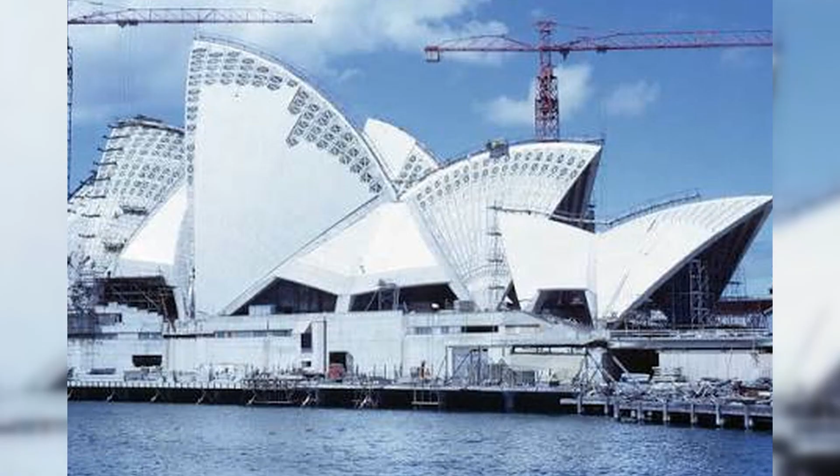In February of 1966, Jørn Utzon walked out of the most important project of his life. The concrete sails of the Sydney Opera House were rising above the harbor, but the interiors were still unresolved, the cost was climbing, and the building was years from completion. Utzon left Australia soon afterward and never returned. Yet the structure he abandoned would become one of the most recognizable buildings on Earth.

Stick around, because the story of the Sydney Opera House is not simply about an architect with a beautiful idea. It is about a design that could not initially be built, an engineering team that had to invent new methods to make it possible, and a political conflict that separated a masterpiece from the man who created it.

The building stands on Bennelong Point, a narrow promontory between Sydney Cove and Farm Cove. Long before the modern city existed, the land was a gathering place for the Gadigal people of the Eora Nation. Its English name recalls Woollaraware Bennelong, an Aboriginal man who became an intermediary between the local population and the first British colonists. A small house built for him once stood near the point. It was later replaced by Fort Macquarie, and then by a tram depot whose long sheds occupied one of the finest positions in Sydney Harbour.

By the late 1940s, that location had attracted the attention of Eugene Goossens, the conductor of the Sydney Symphony Orchestra and director of the New South Wales State Conservatorium of Music. Sydney had grown into Australia's leading city, but its orchestra still performed in the town hall, a venue never designed to serve as a modern home for symphonic music, opera, ballet, and theatre. Goossens argued that a city with global ambitions needed a cultural institution worthy of its harbour. He also insisted that it should stand on Bennelong Point, where architecture, water, and skyline could become part of the same experience.

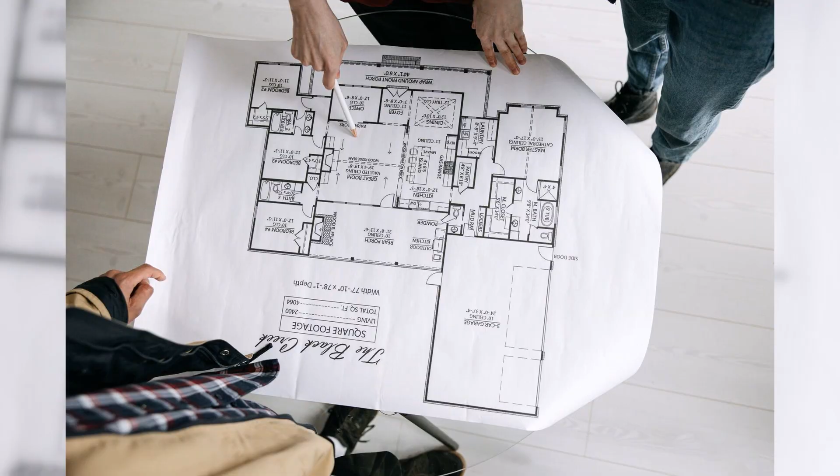The idea gained its decisive political supporter in Joseph Cahill, the Premier of New South Wales. Cahill saw the proposed opera house as more than a venue for wealthy audiences. He believed it could demonstrate that Australia was becoming a confident, modern nation with cultural ambitions equal to its economic growth. Bennelong Point was selected as the site in 1955, and on February 15, 1956, Cahill officially announced an international competition. The brief called for two main halls, one for concerts and large productions, and another for drama and smaller performances. The prize attracted more than 230 submissions from 32 countries.

The winning submission came from a Danish architect who was still little known outside Scandinavia. Jørn Utzon's drawings were remarkably simple. They showed two groups of pale, curved roofs rising from a monumental platform and facing the harbour. The forms appeared to float between architecture and nature. People would later compare them to sails, shells, bird wings, or waves, although Utzon drew inspiration from many natural shapes and never reduced the idea to a single image.

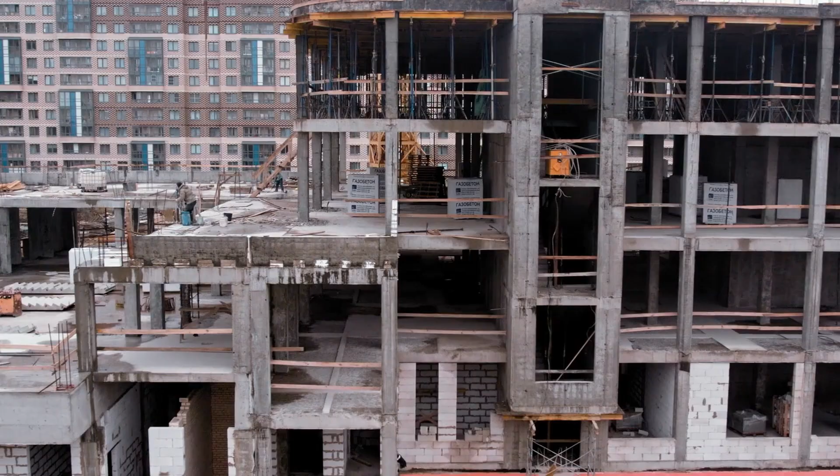What made the proposal unforgettable also made it dangerously incomplete. The competition drawings communicated a vision, not a finished construction system. The roof forms had no clearly defined geometry, and no one yet knew how to calculate, manufacture, or support them. The jury nevertheless recognized their potential. The Finnish-American architect Eero Saarinen strongly supported Utzon's entry, and in January of 1957 it was declared the winner. Australia had selected an image capable of transforming Sydney. It had not yet selected a building that engineers knew how to erect.

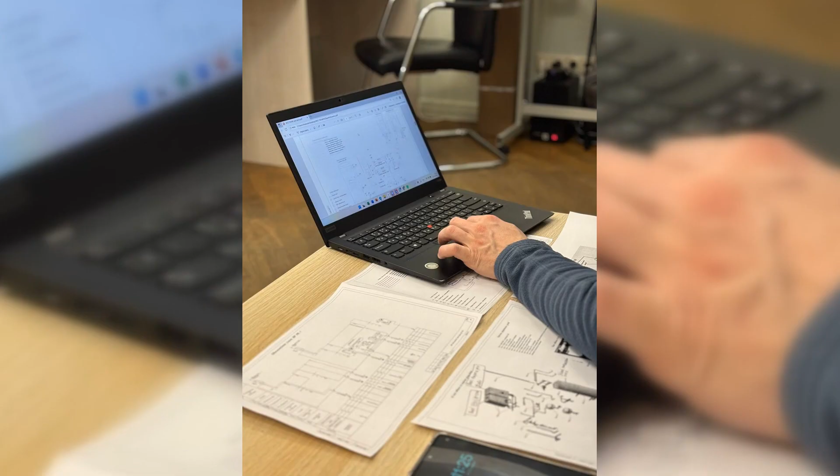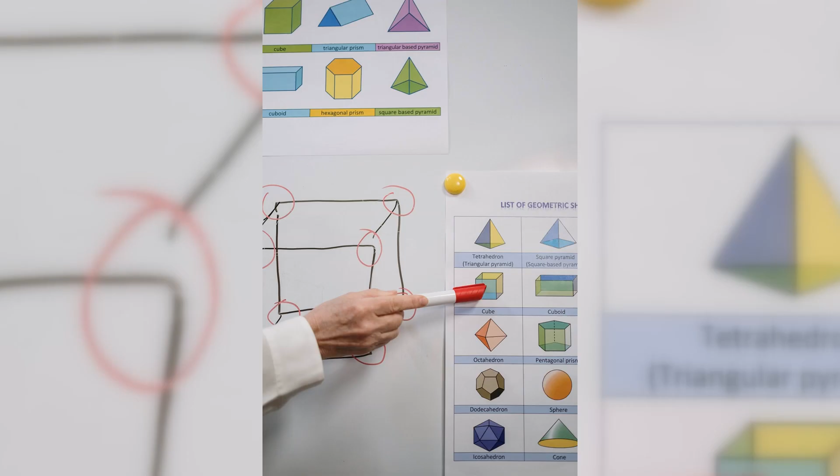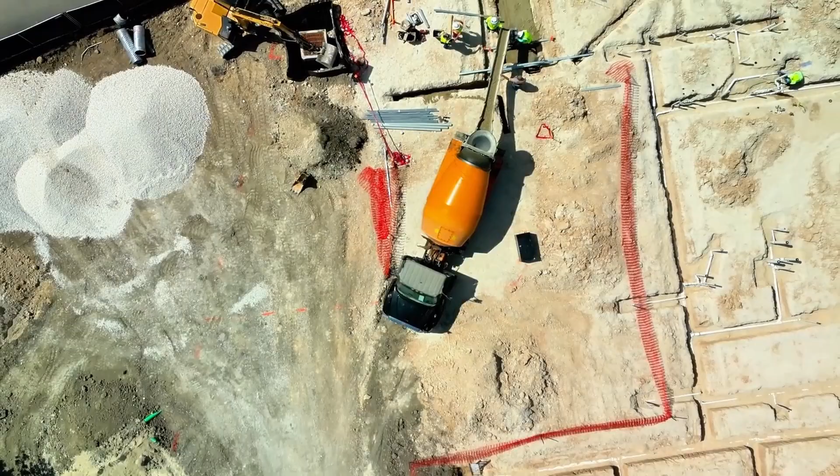Utzon turned to Ove Arup, one of the most innovative structural engineers of the period. Arup had built his reputation by combining engineering discipline with unusual architectural ideas, but even his team found the opera house roof extraordinarily difficult. The designers explored parabolic forms, ellipsoids, and other geometries. Every option created a similar problem. Each roof would require different formwork, different calculations, and large numbers of unique concrete pieces. A shape that looked effortless on paper threatened to become impossibly expensive in reality.

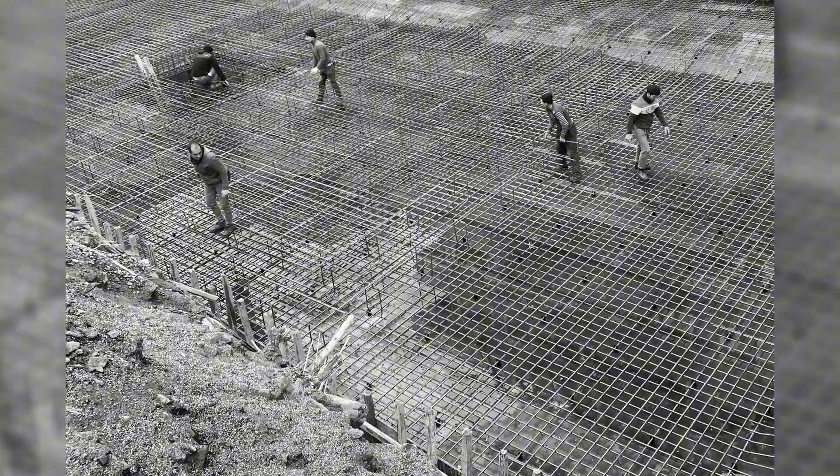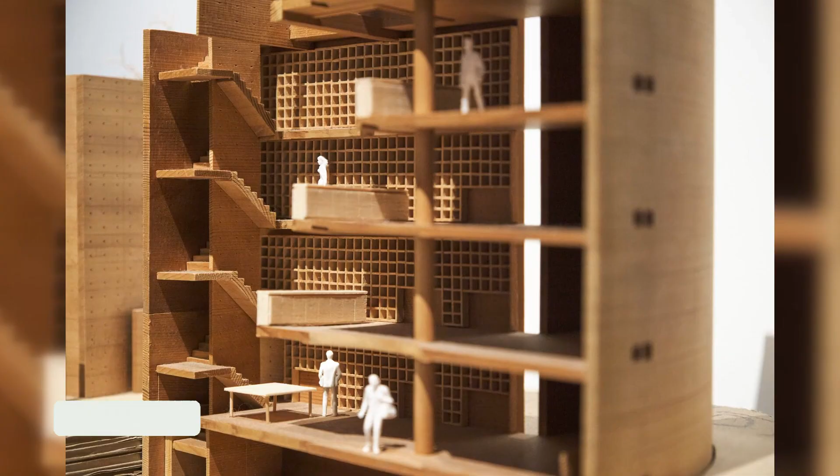Before that problem had been solved, the government ordered construction to begin. Political leaders feared that delay might weaken public support or threaten the financing of the project. The tram depot was demolished, and work started in March of 1959. Civil and Civic began building the Great Podium, while Utzon and Arup were still redesigning the roof above it. The opening was planned for Australia Day in 1963, and the original estimate was roughly 7 million Australian dollars. Starting early created the appearance of progress, but it transferred unresolved design questions directly onto the building site.

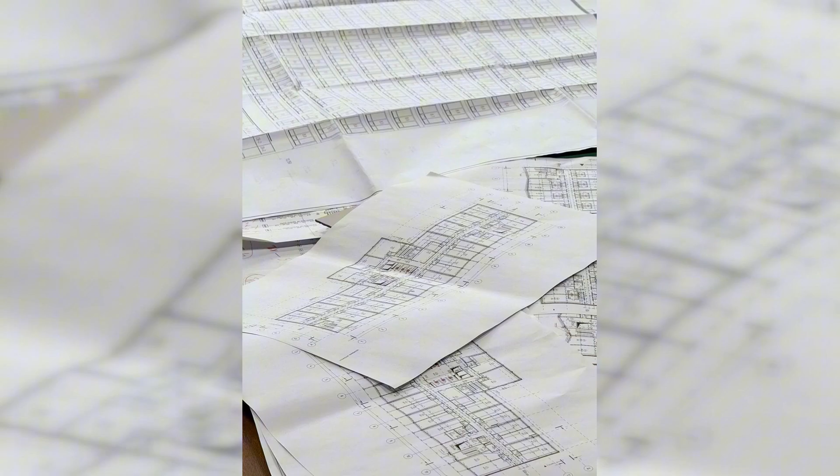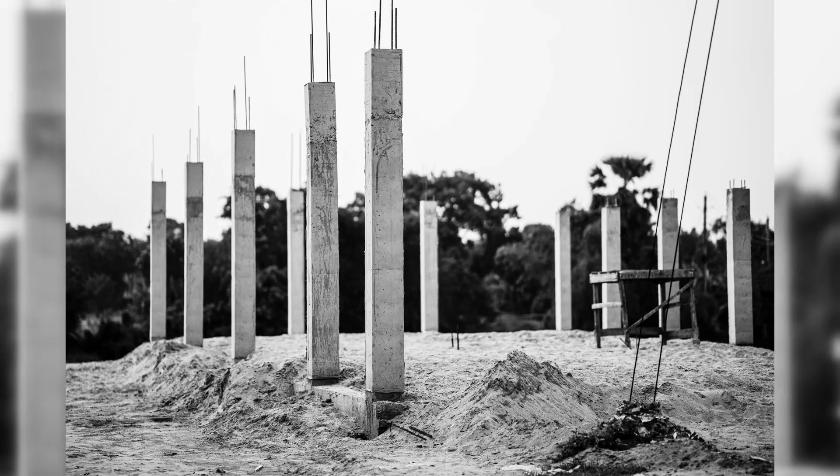Bad weather, drainage problems, changing documents, and incomplete drawings pushed the podium almost a year behind schedule. More seriously, some of its columns had been designed before the final roof loads were understood. They proved inadequate and had to be reconstructed. Sydney was already pouring concrete beneath a roof whose geometry did not yet exist. For several years, Utzon, Arup, Ronald Jenkins and their teams moved through one roof system after another. They needed a form that preserved the drama of the original sketches while allowing repeated components to be manufactured economically.

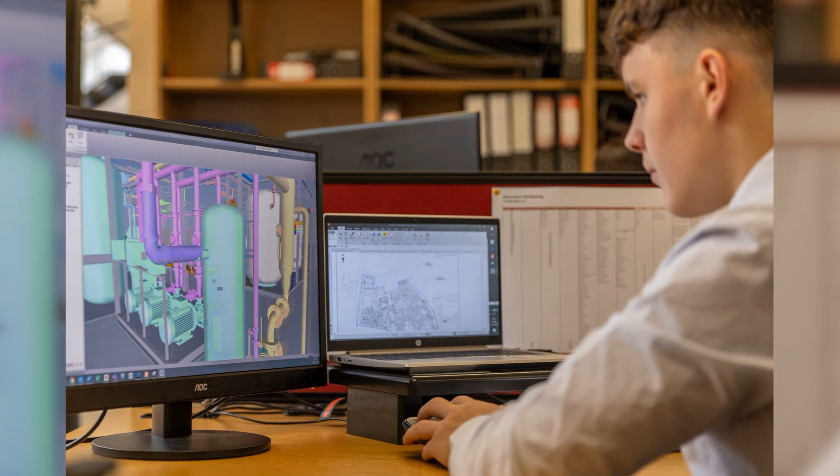The breakthrough finally came from Utzon. Derive every shell from the surface of a single sphere. The idea grew from years of collaboration with Arup's engineers, but it was Utzon's solution that unified the entire roof.

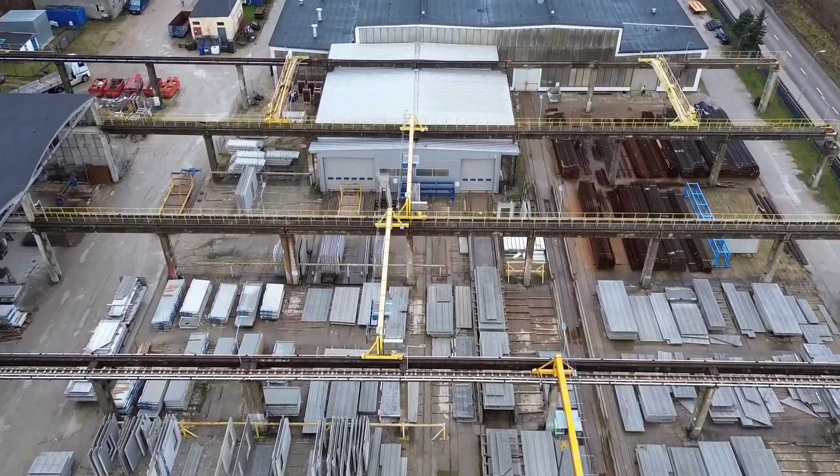Imagine slicing differently sized pieces from the surface of the same orange. Every piece may have a different outline, but all share the same curvature. That common curvature changed everything. Instead of producing unique molds for every part of every roof, the builders could cast families of standardized concrete segments. Ribs of different lengths could be assembled from related pieces and arranged into the fan-like forms visible today.

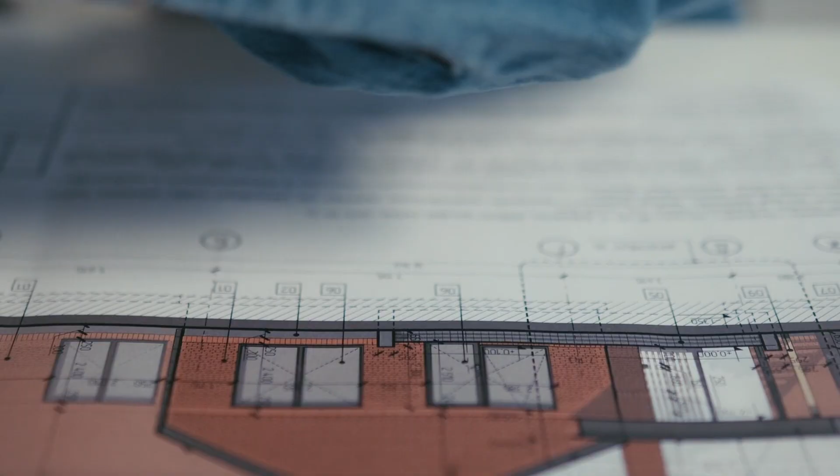The solution did not simplify the appearance of the building. It simplified the hidden logic behind it, turning an expressive drawing into a system that a factory could reproduce. Even with the spherical solution, the forces inside the roofs were too complex for conventional hand calculations alone. The Opera House became one of the earliest major buildings to use digital computers extensively in structural analysis.

These machines were primitive by modern standards, but they allowed engineers to test loads, stresses, and geometric relationships across thousands of calculations. Physical models were also tested in wind tunnels to understand how severe winds would press and pull against the unusual surfaces.

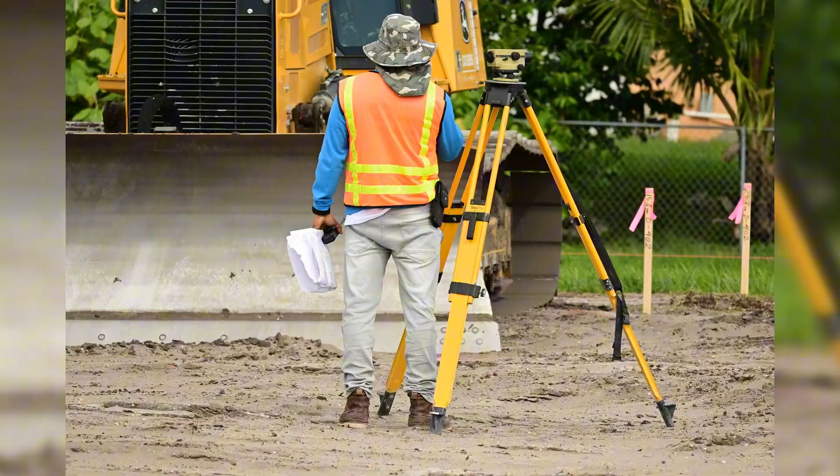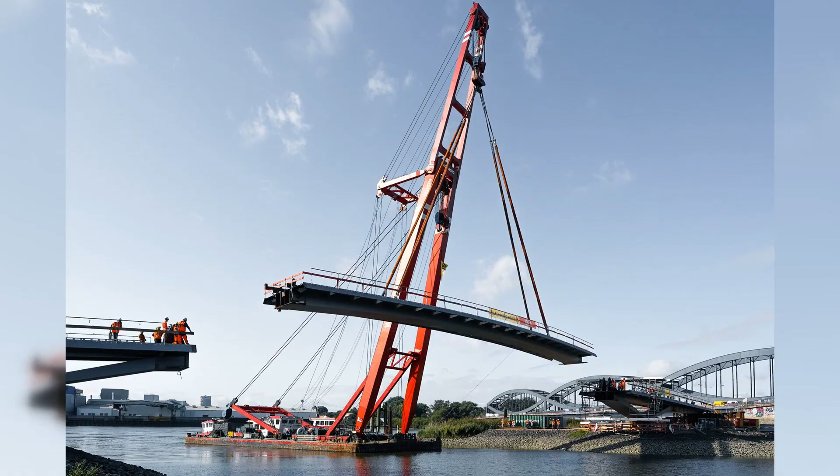Computers returned during construction. As each rib segment was positioned, surveyors measured its exact location. The figures could then be processed so that the team knew whether the structure was drifting away from the intended geometry. Small corrections were made before the next pieces were installed. At a time when most buildings were still designed and checked almost entirely by hand, the Opera House created a daily loop between the construction site, precise surveying, and digital calculation.

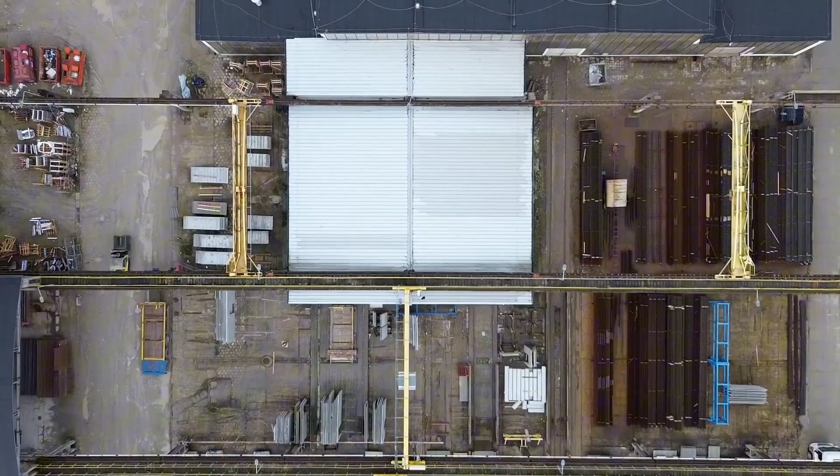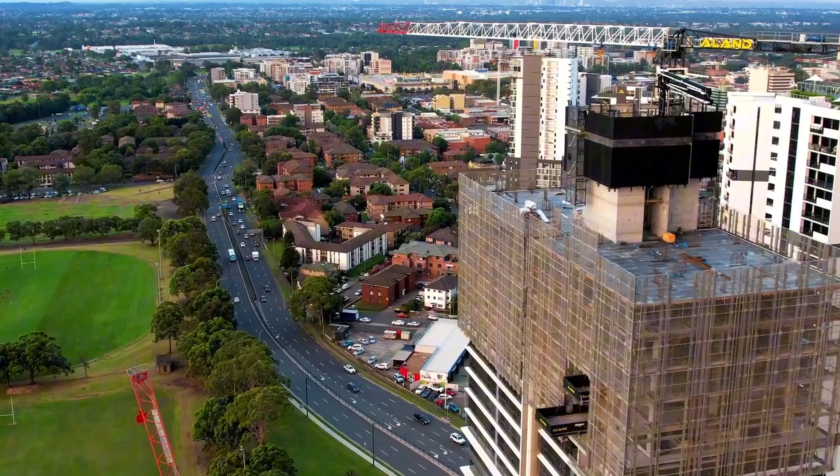The Australian contractor M.R. Hornibrook turned the site into something resembling a manufacturing plant. Thousands of concrete components were cast nearby instead of being formed individually high above the podium. An adjustable steel erection arch temporarily supported the ribs while they were assembled. This system, developed under Hornibrook engineer Joe Bertoni, could be altered for roofs of different sizes and then moved to the next position. Long before prefabrication and integrated digital construction became common industry language, Sydney was using both to build shapes that traditional methods could barely handle.

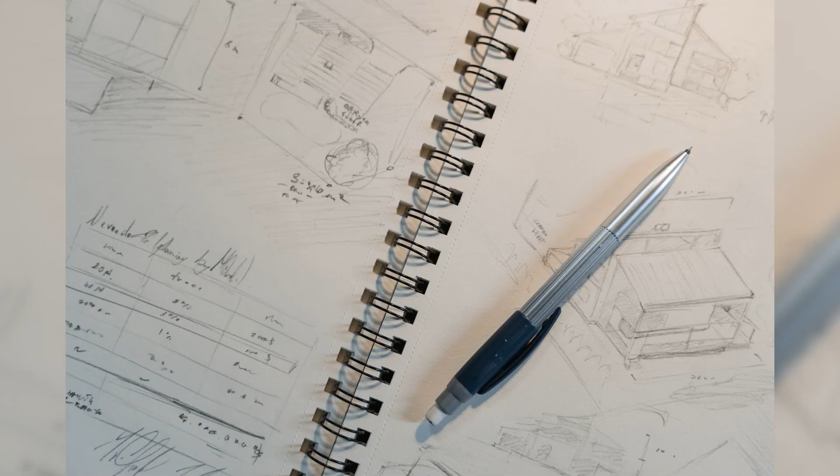The roof surface demanded another specially developed product. Utzon wanted it to appear brilliant in direct sunlight without becoming a flat, glaring white mass. The Swedish company Höganäs spent years developing what became known as the Sydney tile. More than 1 million small tiles combining glossy white with matte cream were arranged in a subtle chevron pattern. From across the harbor, the roofs seem uniformly pale. Up close, the changing finishes break the light and give the surfaces their texture.

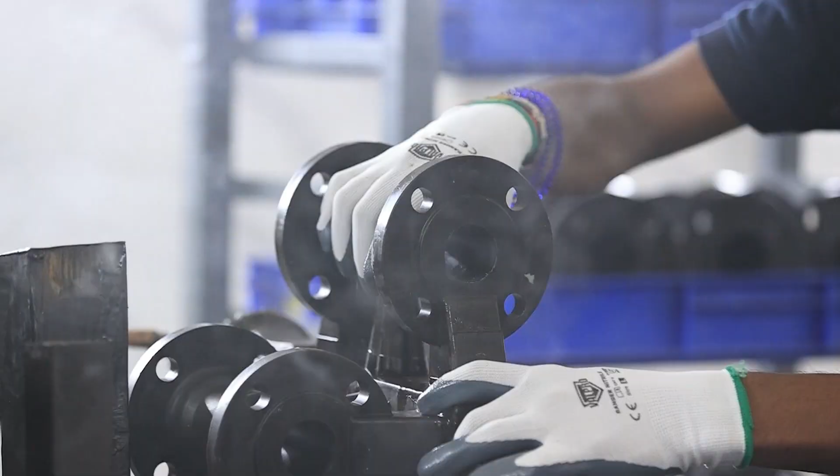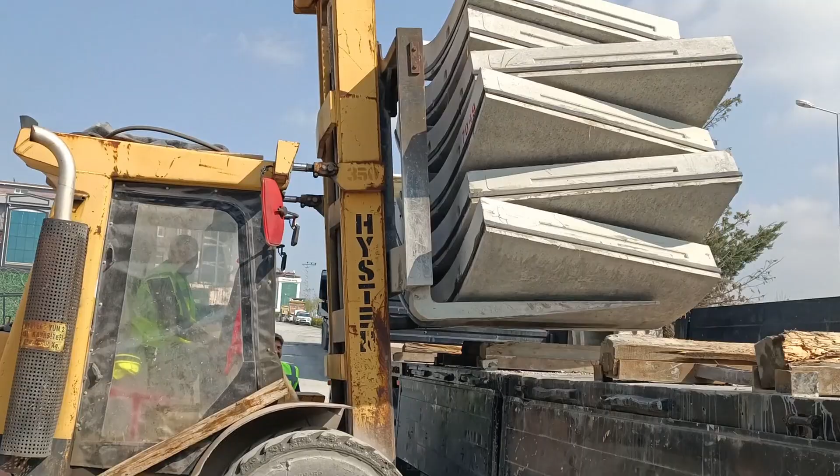Innovation extended beyond the shells. The great end walls required large areas of laminated safety glass, used at a scale that was highly unusual for architecture at the time. Epoxy resin helped connect precast components. The mechanical system used harbor water as part of its cooling process. Architects, engineers, manufacturers, and contractors had to work together from an early stage because no profession could solve the project independently. That collaboration anticipated the integrated design methods now used on many complex buildings.

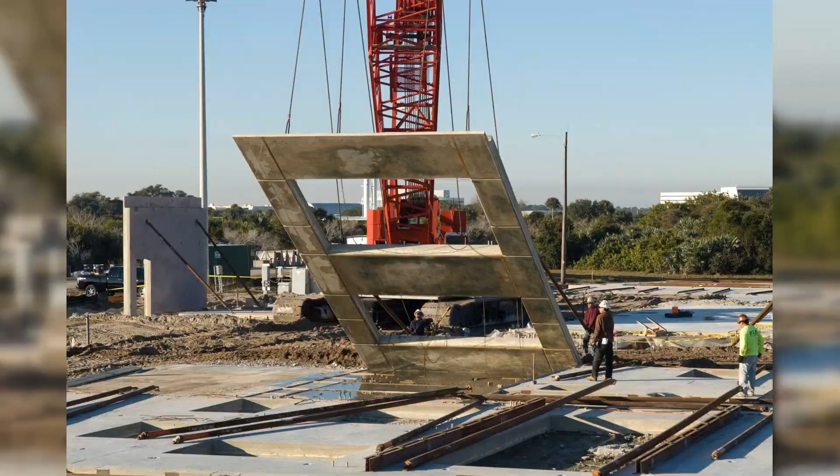By the mid-1960s, engineers had finally solved the problem of how to build Utzon's roof. The harder problem was now the relationship between Utzon and the people paying for it. Joseph Cahill had died in 1959, removing the project's strongest champion. Costs rose as the design developed, deadlines repeatedly moved, and public criticism intensified. After an election in 1965, the new government of Robert Askin placed the project under the authority of Public Works Minister Davis Hughes, a determined critic of its management.

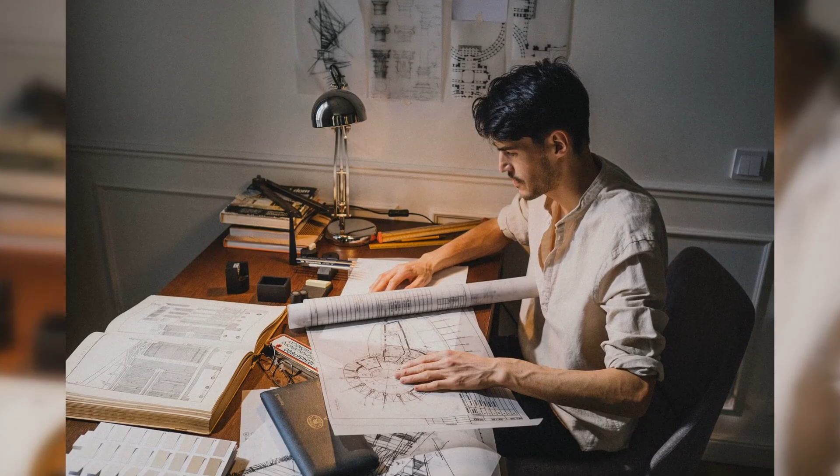The dispute was not simply about artistic taste. Utzon wanted design information, specialist contracts, and communication with suppliers to remain coordinated through his office. The government demanded tighter financial control, competitive tenders, and direct reporting from architects, engineers, and contractors. Officials regarded Utzon's continuing design development as evidence that the project lacked discipline. Utzon believed their demands would destroy the unity and quality of the building.

The conflict became personal and financially destructive. Payments to Utzon were withheld while the government demanded further documentation. By early 1966, his office was owed enough money that he struggled to pay his staff. On February the 28th, he met Hughes and threatened to leave. Hughes refused to release the money. Hours later, Utzon formally wrote that the government's actions had forced him off the project, and Hughes treated the letter as his resignation. Whether Utzon freely walked away or was deliberately pushed out would remain part of the controversy.

Architects and students protested and called for Utzon to be restored. The government later offered him a reduced position under a panel of other architects, but he refused. He left Australia with his family and never returned. By then, the exterior concept was established and the shells were advancing, but many crucial interior decisions remained unfinished. The project now faced a painful question. Who could complete another architect's masterpiece without either imitating him or erasing him?

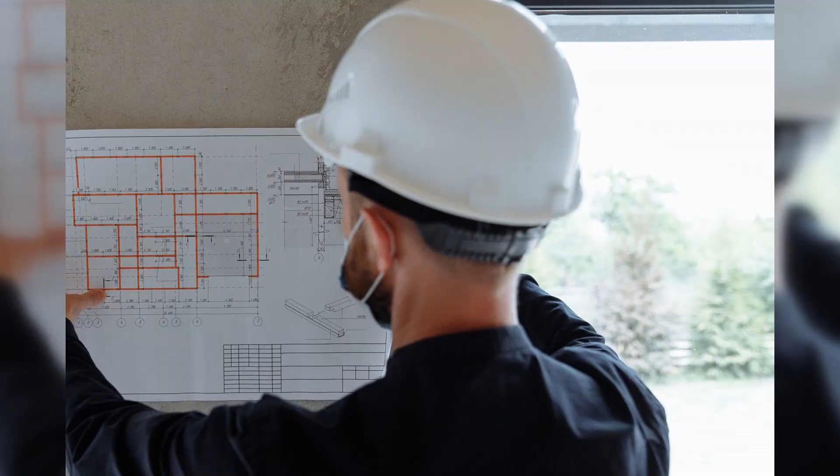Peter Hall initially declined the assignment himself. He had supported calls for Utzon's return and understood that taking the job could damage his own reputation. After the government approached him again and he spoke with Utzon by telephone, Hall accepted. He inherited a building that still needed to function as a working performing arts center.

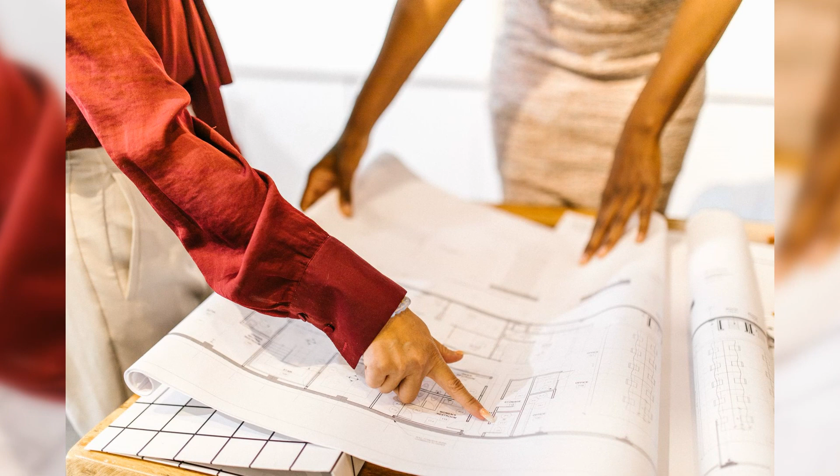Seating, acoustics, stage machinery, circulation, glass walls, dressing rooms, and service spaces all had to fit beneath shells whose external geometry could no longer be changed. Hall and his colleagues, Lionel Todd and David Littlemore, discovered that trying to make the major hall serve both grand opera and symphonic music forced two very different sets of requirements into the same room.

Opera needed a stage tower, scenery movement, and an orchestra pit, while concerts demanded a different arrangement and different acoustic conditions. The team ultimately made the larger room a dedicated concert hall and placed opera and ballet in the smaller theater. Interiors and plywood systems envisioned by Utzon were discarded or redesigned, while already planned stage equipment was removed. These decisions allowed the building to open, but they created compromises that lasted for decades.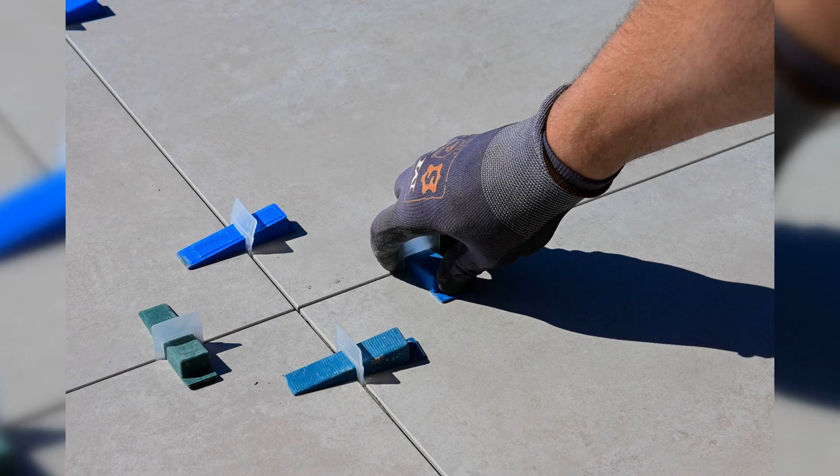The opera theater had restricted backstage space and a cramped orchestra pit. In the concert hall, the great volume above the stage made it difficult for musicians to hear early sound reflections. Suspended acrylic rings were added in an effort to improve the problem. The exterior became universally celebrated, while performers and technicians understood that the beauty of the shells had imposed a difficult internal geometry. Construction continued through labor disputes, design changes, and relentless public scrutiny.

The project originally expected to open in 1963 for about $7 million. It was completed roughly 10 years later for about $102 million. Much of the cost was financed through a state lottery, spreading the burden across years of ticket sales rather than relying only on ordinary government revenue. By almost any conventional measure of scheduling and budget control, the project had failed spectacularly.

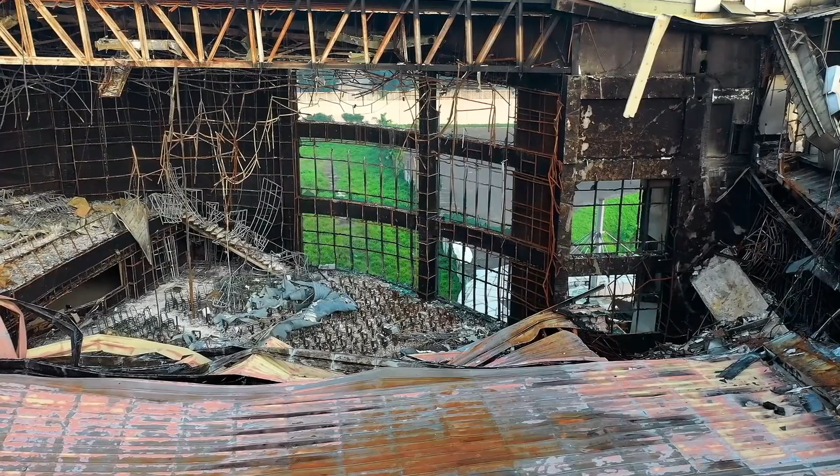Yet, on October the 20th, 1973, those numbers temporarily gave way to the building itself. Queen Elizabeth II formally opened the Sydney Opera House before a vast crowd. Fireworks crossed the harbour, and Beethoven's Ninth Symphony formed part of the celebration. Utzon had been invited but chose not to attend, avoiding a return that might have reopened the political dispute. His name was acknowledged by Premier Askin, but the architect watched the building's rise to fame from the other side of the world.

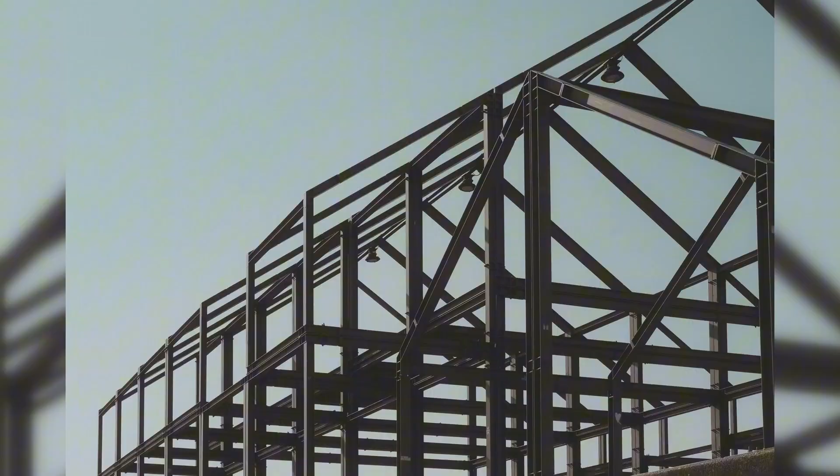The public judgment changed with remarkable speed. What had been attacked as an expensive white elephant became the defining image of Sydney and, eventually, of Australia. The Opera House demonstrated that the country could produce not merely a useful cultural building, but an architectural work that altered the international perception of an entire continent. Its methods also traveled. Computer-assisted structural analysis, precision surveying, standardized precasting, large laminated glass walls, and close collaboration between designers and builders became increasingly important to later generations of complex architecture.

Recognition of Utzon took longer. In the late 1990s, the Sydney Opera House Trust restored contact with him and appointed him as a design consultant. Working from Denmark and with the involvement of his son Jan, Utzon established principles for future changes to the building. The former reception hall was rebuilt according to his ideas and reopened as the Utzon Room, the first interior space to fully carry his design language. It was a reconciliation, but an incomplete one. Utzon died in 2008 without ever returning to stand inside the finished opera house.

The building itself continued to evolve. Stages, foyers, access systems, and performance spaces were upgraded, while major work in the concert hall addressed machinery, safety, and the acoustic weaknesses inherited from the original compromises. In 2007, UNESCO placed the Sydney Opera House on the World Heritage List, recognizing it as a masterpiece of 20th century architecture. It remains a working complex rather than a frozen monument, hosting opera, theater, dance, orchestral music, public ceremonies, outdoor performances, and events projected across its famous roofs.

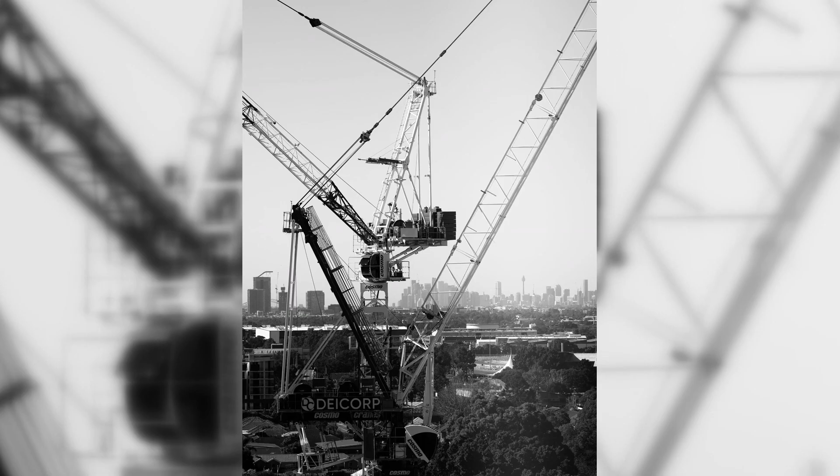The Sydney Opera House is often described as the vision of one genius, and without Jørn Utzon it would not exist. But the finished building also carries the work of Ove Arup and his engineers, Hornibrook's contractors, Joe Bertony's construction ingenuity, Peter Hall's difficult interior decisions, thousands of workers, and a government that both made the project possible and drove its architect away. Its history resists a simple verdict. It was a triumph of design and engineering, a disaster of administration, and a cultural investment whose eventual value exceeded every early calculation.

So was the Sydney Opera House worth the delays, the enormous cost, and the loss of the architect who imagined it? Or does its beauty make us too willing to forgive the failures that almost destroyed the project?